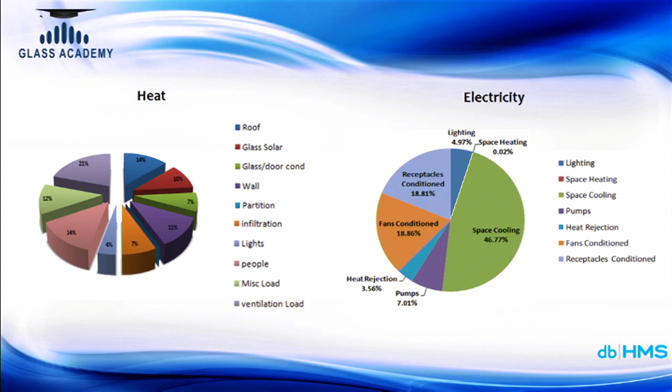Then we come to selecting various wall, roof and glass combinations. Today we have various options available, and most of the time this is determined by U value, K value, or for glass, U value, SHGC value and VLT. So what we generally do on actual practical projects is create a kind of comparative graph.

How much is the differential heat contribution on a project? If we don't apply it on a particular project and purely compare two options, for example, an aerated concrete block is obviously a better insulating material than a regular brick wall. If AAC block has a 3 times better value than a regular brick wall, we cannot assume that the energy consumption is going to be 1/3. What we really need to do is apply it on a project.

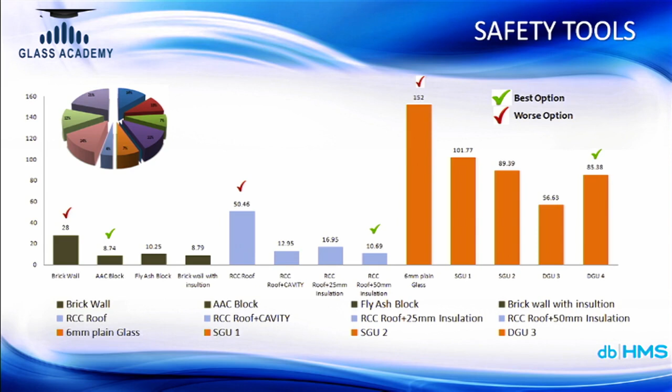So a point to note in this is we should look at overall contribution on a project and not conclude based on only comparative technical or U value differential. So we looked at a slide where we were trying to compare wall, roof and glass separately. Now, once we have selected best and worst cases out of it, we can also combine all these things together and compare the overall impact on a project with different combinations of wall, roof and glass.

For example, in one case, we realized that a particular glass is better for a project, but cost-wise it was quite expensive. So we might choose not to go with the best choice of glass; however, we can go with the best choice of wall and roof, and together as a combined option that might be more attractive in nature, which would be a good addition on a project.

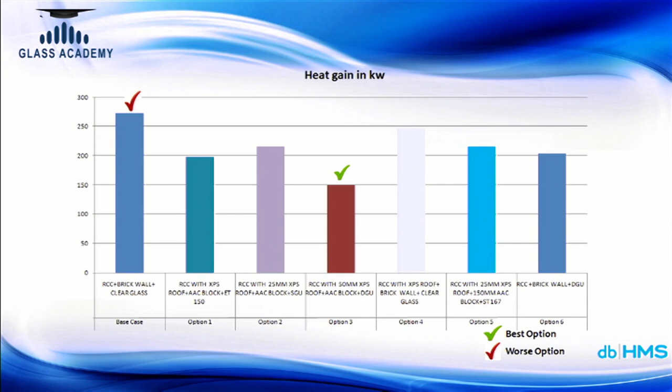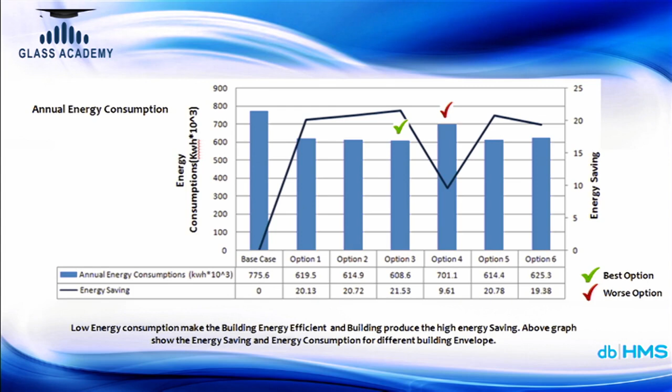Then we also need to link all this overall contribution to the energy consumption level as well. So in the same study, we can also see how much is the kilowatt hours of saving that we can get on a project. So linking cost, U values and kilowatt hours becomes quite good parameters to select on a building.

Generally in India we always think courtyard buildings are ideally suited for the Indian climate. But we also need to understand that courtyard buildings also have larger surface area. So we cannot blindly decide that courtyard is the best suited option. We need to weigh between the daylight impact, ventilation impact and heat contribution. So in many cases courtyard might come out as a better option, but not necessarily in each and every project will it come out as the best option.

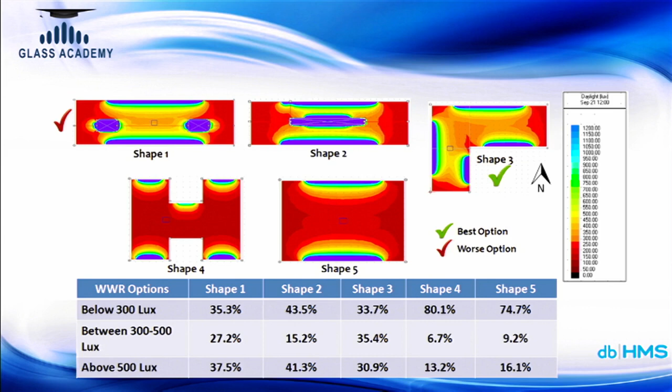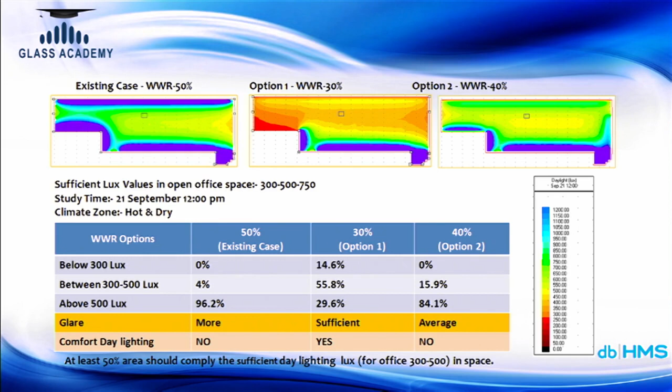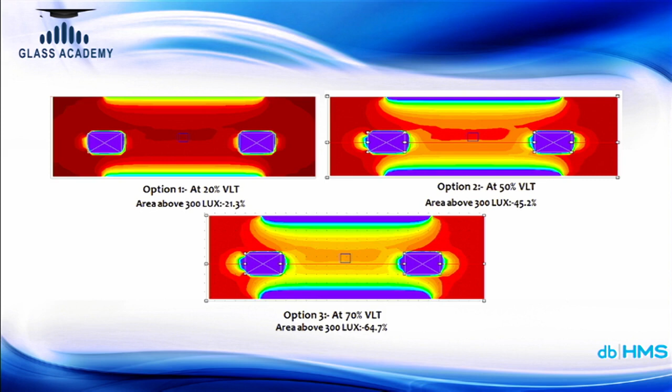Then if we cannot change the orientation, if we cannot change the building shape, if we cannot change the window to wall ratio, then we come to a last resort where we have only one alternative to change the performance, which is the kind of glass. So today we have various glasses which have different U values, different SHGCs, different VLT values. So we have a wide spectrum of glass properties available to select from.

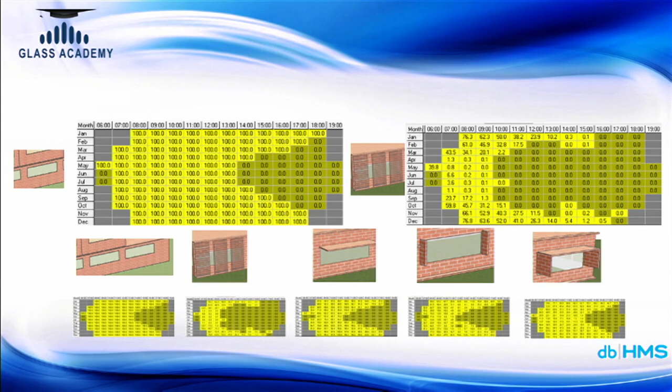So this is just one of the options, but as you see below, there can be various other options that we have, different shading devices which we can play with. So this is dependent on the direction of a window as well. This study is for a particular direction, but we can carry out a similar kind of study for all directions, north, south, east, west, or if a building is also exposed at a 45 degree angle, we can do this kind of study for all kinds of angles as well.

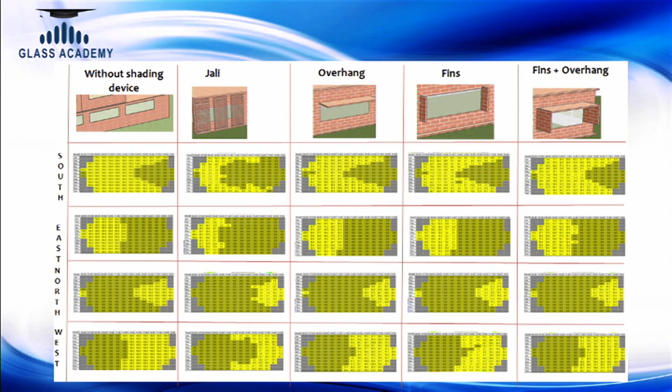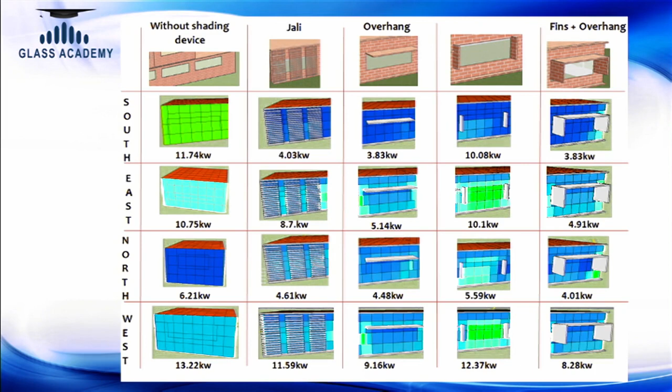So this is telling us how much is the overall solar radiation falling on a particular window. The same study can also be taken ahead, and we can also check how much is the kilowatt heat contribution because of a change in the shading device that we have. So what you see on the screen is how much is the overall kilowatt heat contribution happening because of different options. So if we do such studies, there are various kinds of shading devices which can become a solution. For example, what you see on screen is one modern solution, and one is an old way of solving the same problem.

But the important aspect is, if we have well shaded windows, that we need to factor in when we select a kind of glass or a kind of envelope. Lastly, overall we can predict. So what you see on the screen is the solar radiation falling on a building. Red color is maximum intensity and blue color is least intensity. What you very clearly see on screen is most of the roof areas have maximum intensity, but most of the facades, which are wall and glass, have a blue shade.

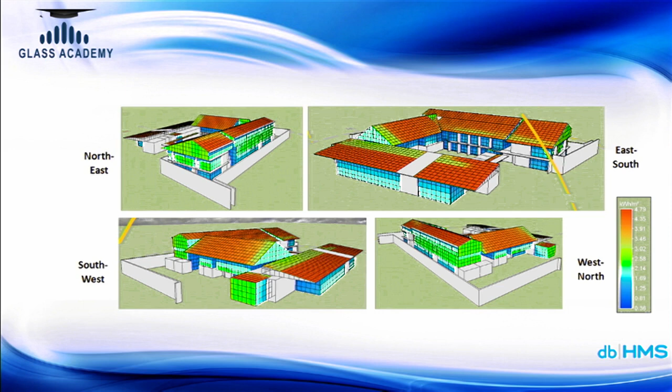That means whatever studies are done, when finally a solution is arrived at, we have facades which are naturally well shaded. So when we reach this point, we are very sure that we have a well designed building, and only after this point can we start looking at technical aspects of wall, roof and glass. Only after solving all these things is the right point where we start looking at what are the U values, what are the resistance values, what are the VLT values for glass, roof as well as walls.

Another case study. The earlier case study that we talked about is when we start early on in a project and we have flexibility to select orientations, window to wall ratios, shadings, as well as different qualities of wall and glass. Many times we can also be on a project which is quite advanced and we have a limited area to improvise on. There we might be looking more at selecting the right U values and more technical aspects of it.

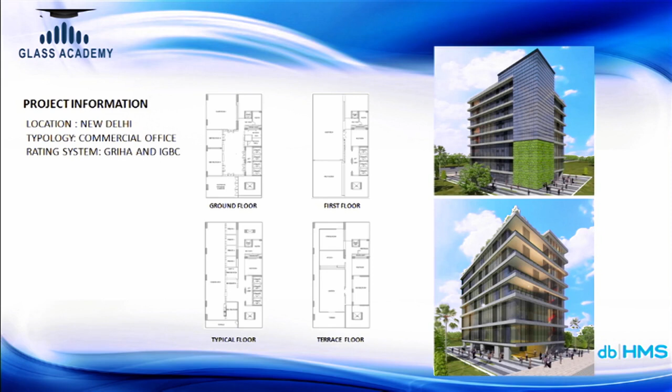So this is a case study. It's a corporate office. The project is in Delhi, and this is the overall view that we have. There are different floor plans that we have. Earlier when we started looking at this particular building, there was a facade that we had in front.

This building was also going for IGBC as well as GRIHA rating. IGBC as well as GRIHA both give a prescribed U value for wall and roof, and SHGC, U value and VLT ratios for the glass that we select. So when we started looking at it, the project was trying to go ahead with a particular glass which was qualifying under one rating, but it was not qualifying under a different rating.

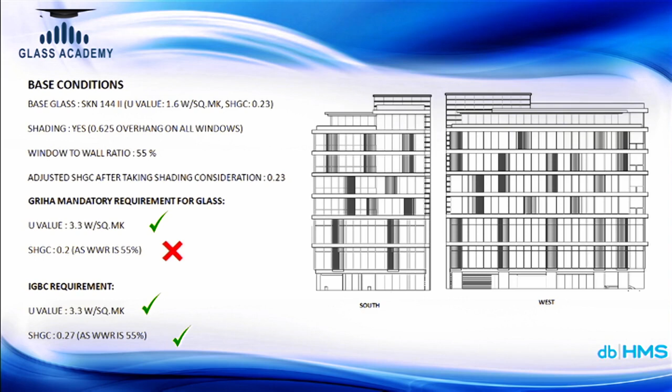The window to wall ratio was qualifying overall, and the SHGC was slightly a challenging scenario. So after going through various studies, what we realized is there are three ways to tackle this scenario. So option one was we reduce the overall window to wall ratio, because the less glass, the less is going to be the contribution. So if we have less glass, then we can have slightly more clear glass, or we have more leeway on the SHGC value that we can select.

So one of the options was to add some more shading devices on the facade, and this is also specific to the direction of the glazing as well. So we suggested various different percentages of shading devices spread across various facades. That was one option which was possible. Another option which was possible is to change the overhang length. So we tried out various depths of overhangs.

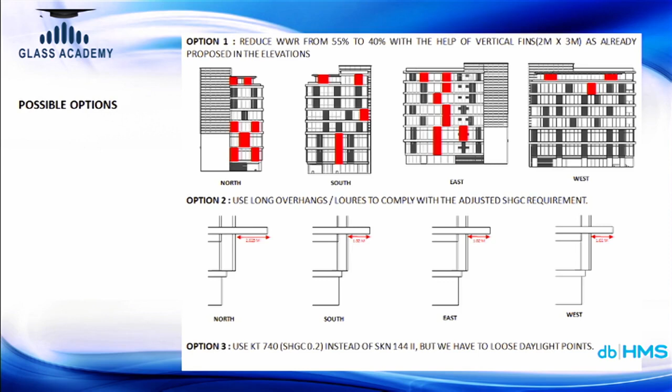And the third option which was possible was purely changing the kind of glass. But if we don't do option 1 or 2, then the option that we were left with is having a particular glass which was quite darker in nature. So it was not giving a nice look to the building, as well as from inside it was not giving nice views outside. So on this particular project we went ahead with the first option and then improvised different kinds of glass properties on different levels of the building as well.

So overall we reduced the overall window to wall ratio. We changed the overall VLT values to achieve maximum daylight. We achieved an overall heat reduction of almost 12%. The overall energy impact of that was almost around 35 to 43%. Aesthetically, we managed to keep it a good looking building as well and not make it too dark. So there are various good aspects which really came out of this study.

The next study I'm going to talk about is another project. This is in Gurgaon, so it's again a large corporate office building. The overall architect's vision was it should look lighter in nature. So the first instinct was to go with an all glass kind of building, but that was not a good choice, as we all know that it really has a direct impact on air conditioning load as well as energy consumption. So what was really done is the overall facade, though it looks more like glass, is divided into different types of glasses.

So on some part where it's directly between sill and lintel level, we have clear glass, but at sill level and lintel level, where above lintel level generally we have a false ceiling, all area in front of that was made so that, though it will look like glass from outside, it is opaque from inside. Same is true at sill level as well. So using that, we reduced the overall window to wall ratio on the project.

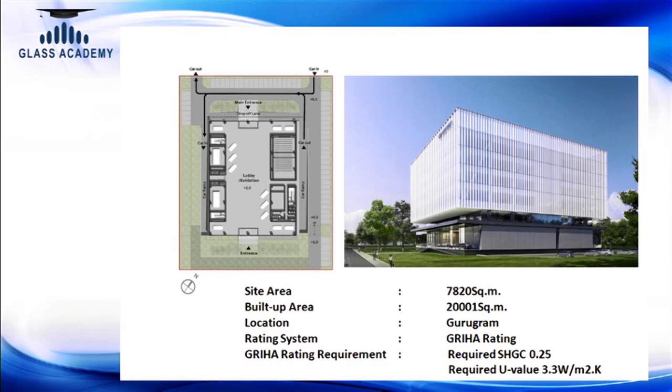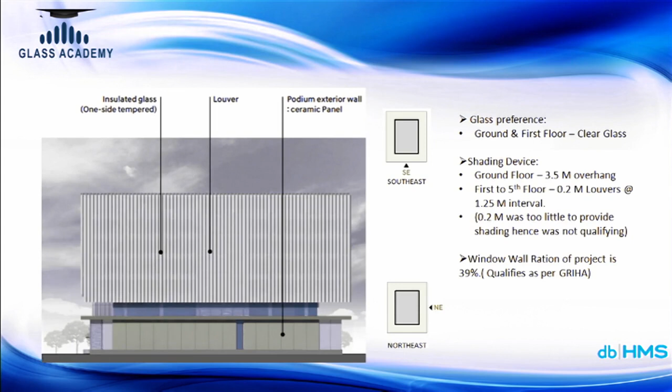Another aspect that we introduced is louvers. So there are louvers all around in all directions. The depth of louvers varies based on which direction we are in. So we also worked out various options of what the overall depth of each and every louver will be. Another aspect that we also looked into is having different kinds of glass based on what kind of function is there on each floor.

For example, the lowermost floor was more of a showroom kind of activity. So they wanted more clear glass so that people from outside can very easily see inside. So on the lowermost floor, we have gone with more clear glass, while on the floor above where we don't need that much clarity, we have gone with an efficient SHGC value. So we have more of a reflective glass.

So with a weighted average methodology, we can also change the kind of glass on different sides to really achieve the overall saving. So though the overall building still looks more like glass, the overall window to wall ratio, shading, and high performance glass have all been taken care of. So in this particular project, we are achieving almost 24% of energy savings compared to the baseline given in IGBC as well as GRIHA. Thank you.